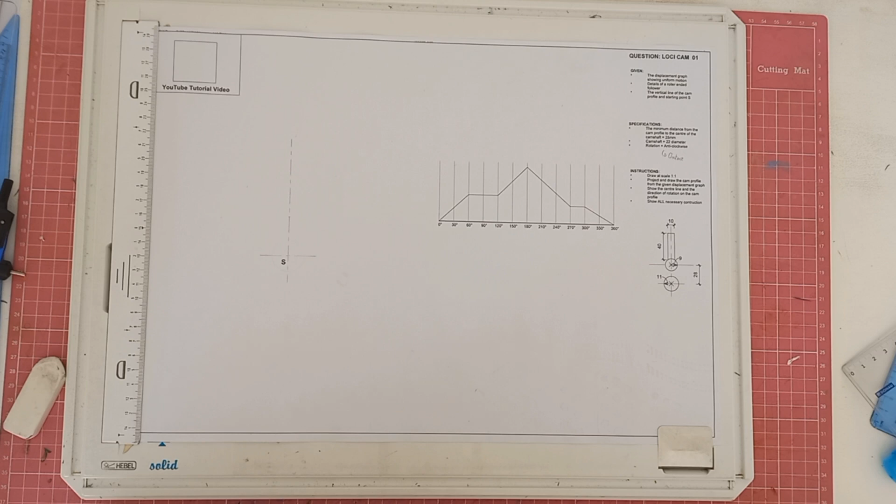So we know that when you do a cam, if they give you the rotation as anti-clockwise, it will become clockwise, just the same as if it had to be clockwise, you would label anti-clockwise, but in this case we will be labeling clockwise. Okay, this here is our camshaft, and it is where we are going to start our drawing.

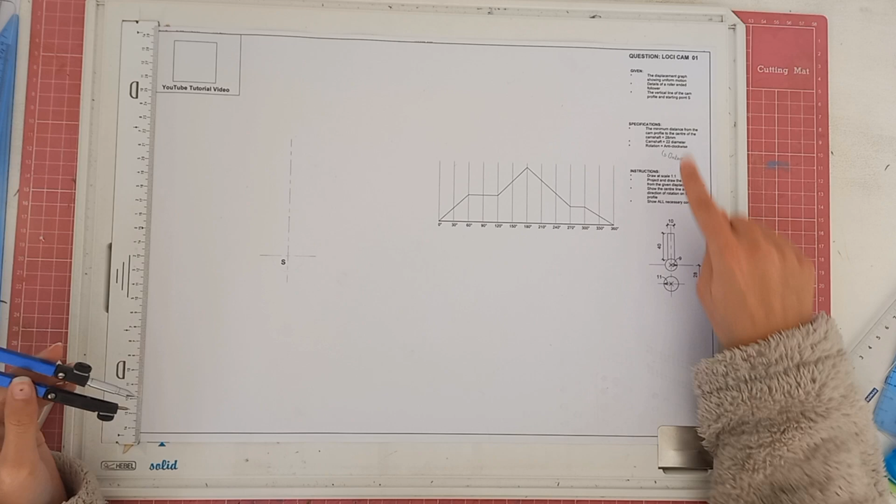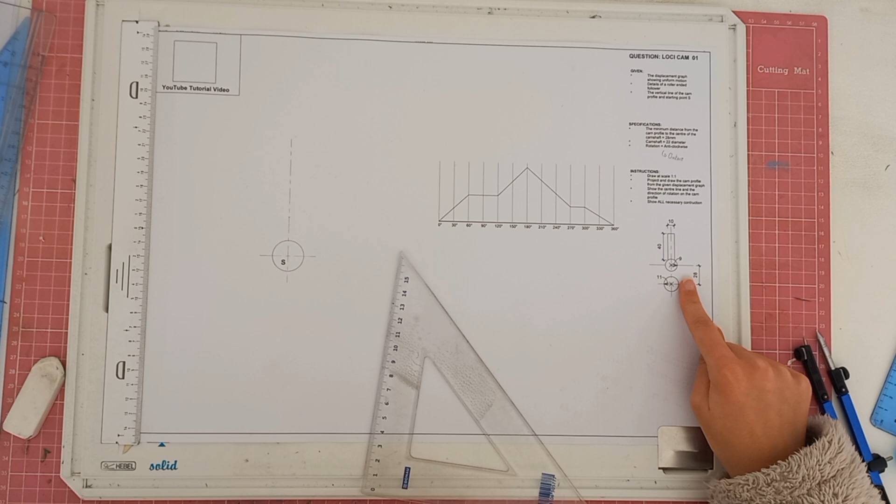So we're going to start off by taking the radius of 11, and once we've got our radius of 11, we are going to draw a circle on our starting point S. Okay, just like this over here. Once we have done that, we are going to take the distance from the camshaft to the center of the cam profile, and that will be 28. So we're going to measure 28.

And once we've got a line there, we're going to take our radius of 9 mils, grab it on our compass. So here we've got 9 mils, and we are going to draw a circle, and this will form part of the roller-ended follower.

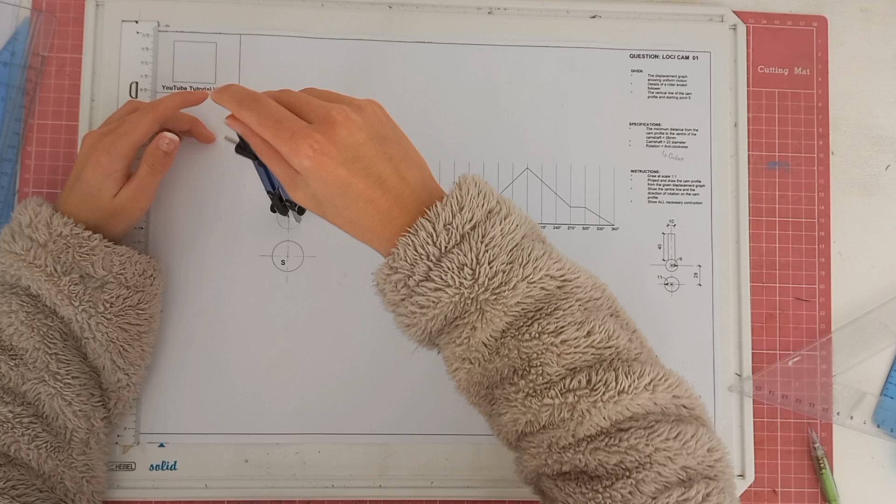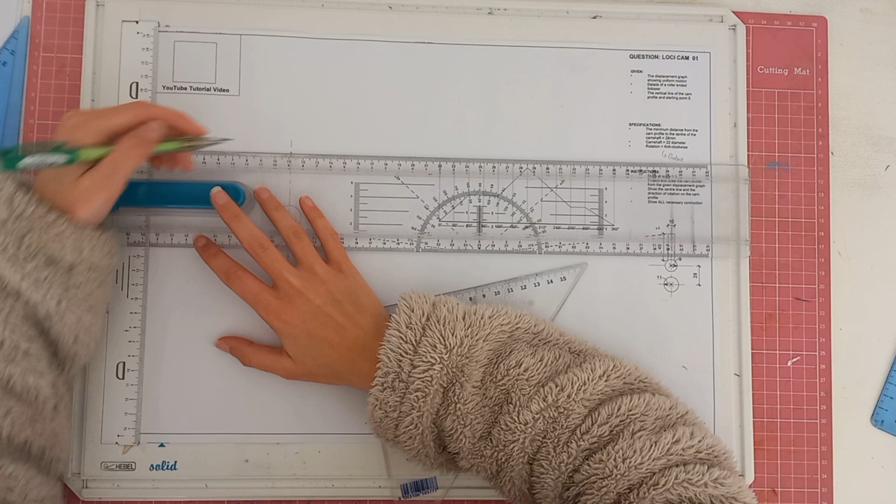Okay, so now that we've got that, we have got the total height of 40. So we're going to measure 40 from the bottom to the top over here, just like that, as you can see with the given measurements. And then we are going to draw a line at the top there, just neatly and lightly, and then we're going to measure 10. And this is all so that we can get the start of our cam together.

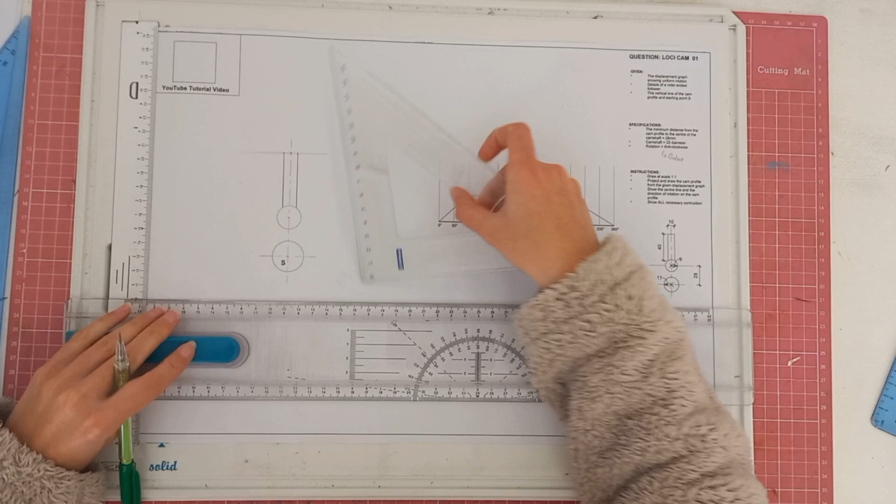Okay, so we're going to draw a line over here as well as a line over here, and then we'll obviously seal off the top as well. Okay, so there you can obviously see that our cam profile is done for the roller-ended follower, and we are now going to start drawing the cam based off of the graph.

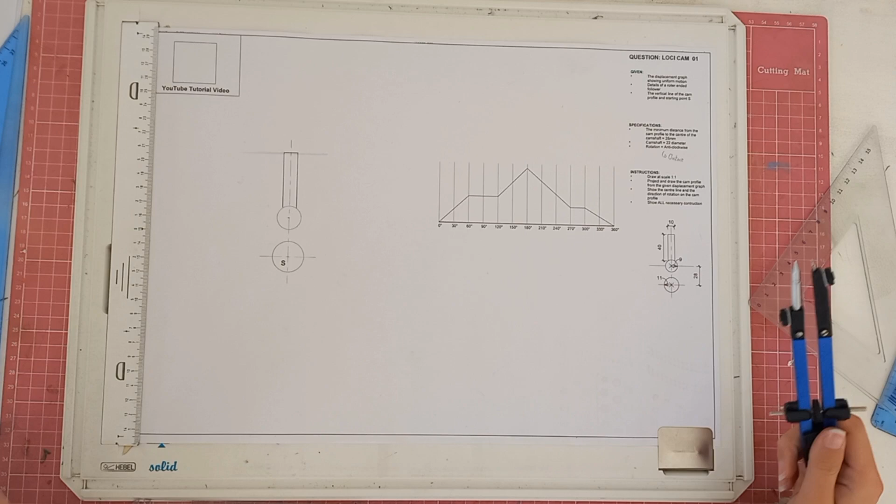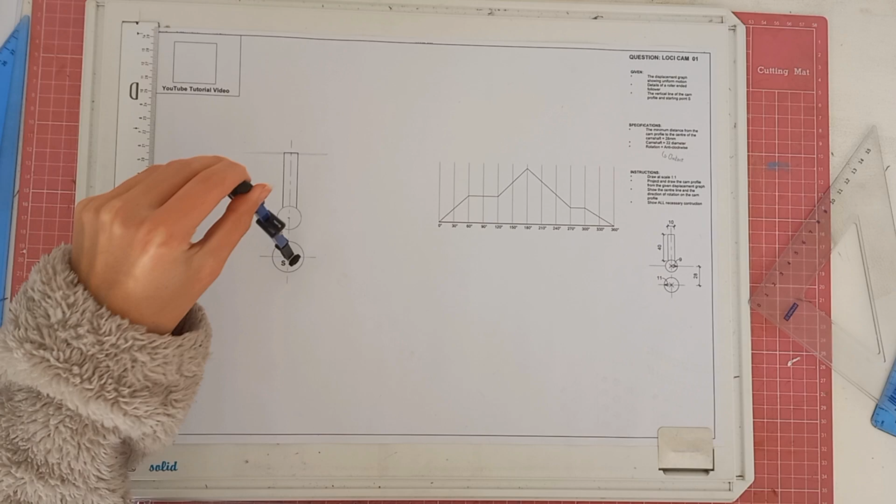So the first thing we are going to want to do is grab the height of our end bit over here. Okay, it should be in line with your graph as well, and you're going to start off by just drawing a circle going all around your page, just like this over here.

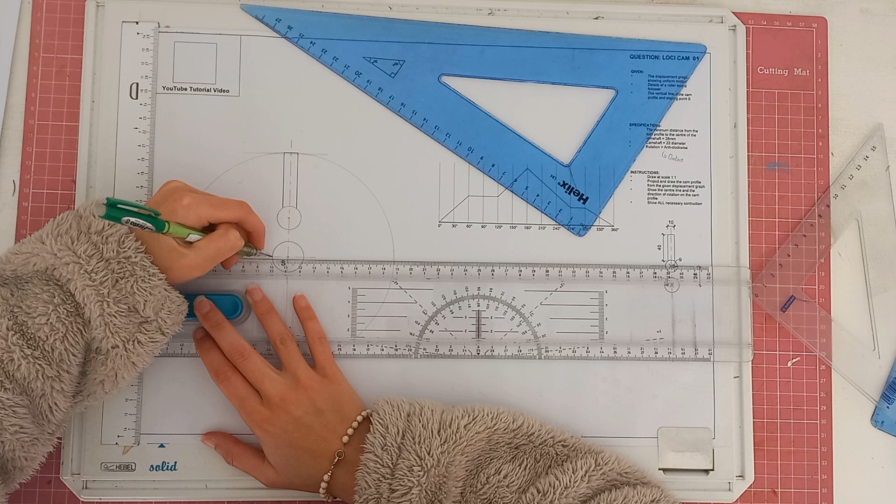Okay, and then what you're going to do is you're going to section your cam. So we're going to draw a line there to the end of the circle, and we will have lines over here as well. Okay, and then obviously we have sectioning of the circle, which we know will go in 30 degrees and 60 degrees, and so we're going to measure as such.

Okay, so we've got that over there, and then we will have this as well. So we'll have 60 degrees or 60 degrees and our 30 degrees as well. Okay, so just like this over here.

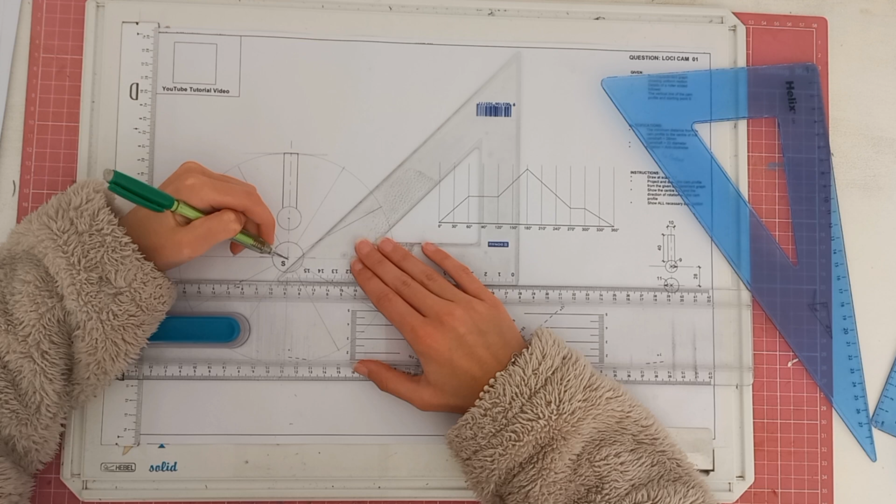The reason why I've left a space in the circle in the middle is because you are actually supposed to hatch that circle with 45 degrees, and so I think we should just do that quickly before we even get started. So let's just hatch that quickly. Remember, your hatching needs to be lighter than your total drawing overall. So we're just going to hatch that, hatch that, and hatch that as well. Okay, so it should look like this.

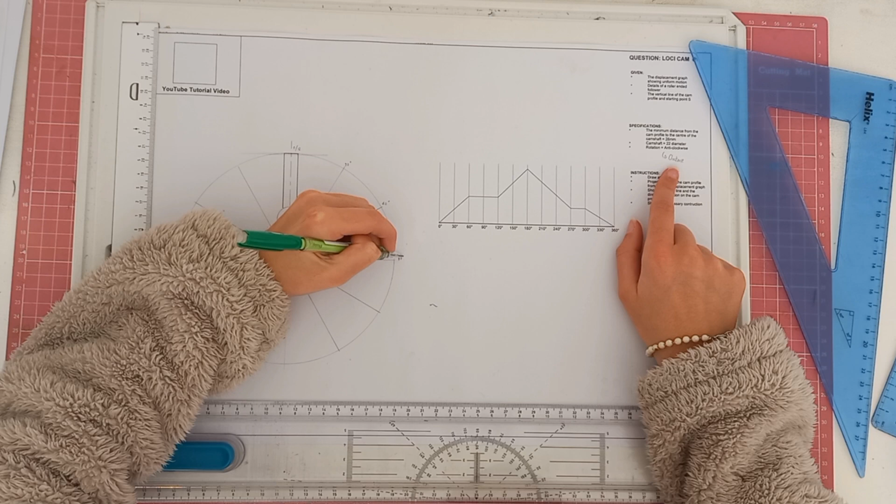Once we have done that, we're going to now label our circle. So obviously we're going in a clockwise direction, so we'll have 0, 12, we'll have 30 degrees, 60 degrees, 90 degrees, 120 degrees, 150 degrees, 180 degrees, 210 degrees, 240 degrees, 270 degrees, 300,

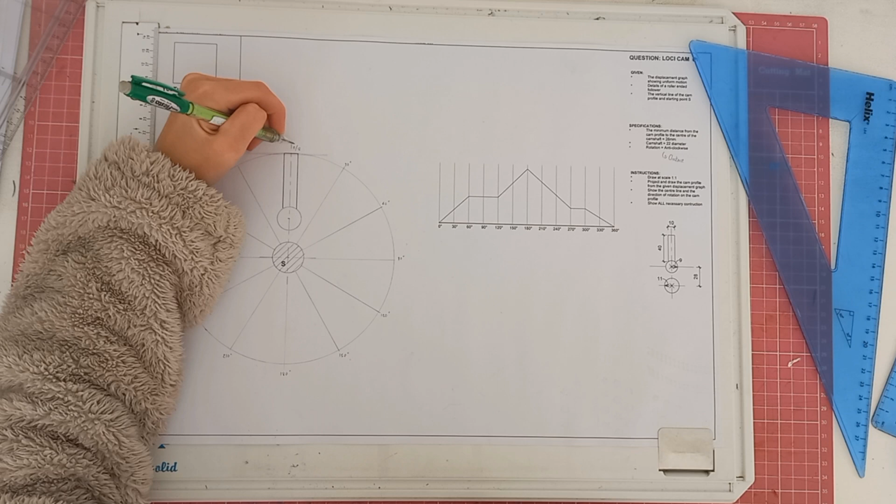330, and I don't know why I put 0, 12 here. This is actually supposed to be 0, 360 degrees, so my apologies for that. Okay, and you'll have something that looks like this. Now the reason why we label it is because it makes it easier for you to see where your cam is going to end up when you're drawing.

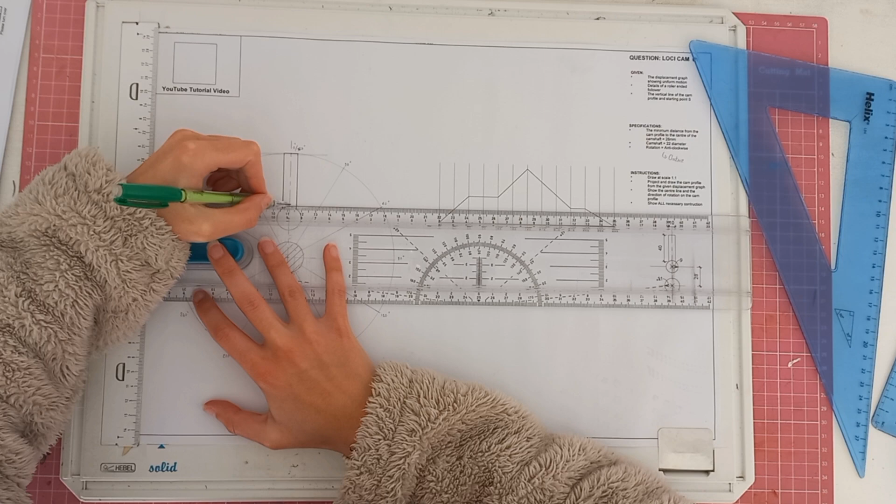And what I mean by that is 0 will obviously be right in the middle of our ball over here. Okay, so when we want to get the measurements of 30, we're going to draw a line going up. So let's just grab our point 30. We're going to put it on this line over here. As you can see, it's over there.

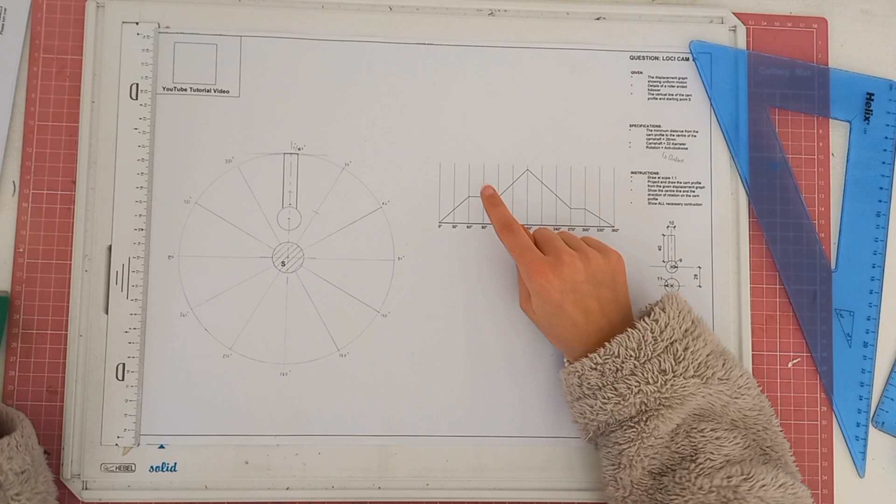And then what we're going to do is we're going to grab that point with our compass. So we should have that point over there. We're going to make a mark at 30. And we're pretty much going to do the same with the rest of the points. So here we've got our next point, which we're going to bring across onto here. Okay, and it obviously is the same for 60, 90, and 120.

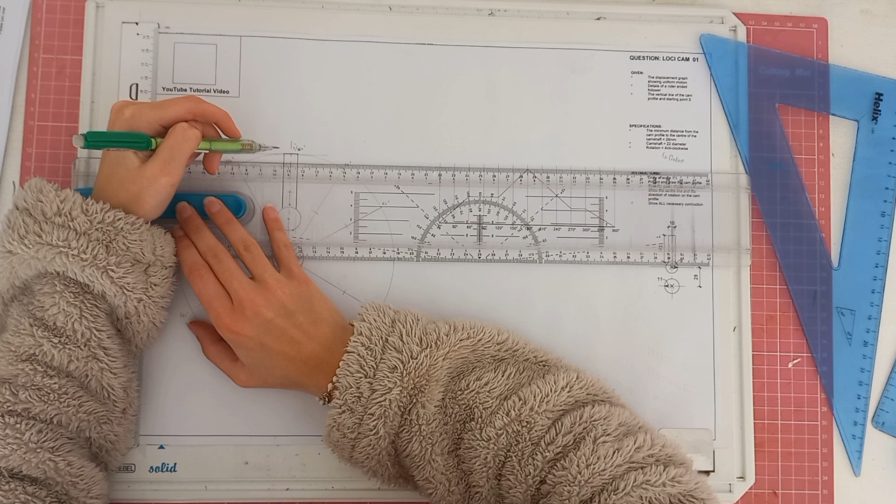And so you're going to grab the height of that point and you're going to make a mark at 60, 90, and 120. All right, once you've done that, you're going to continue. You're going to have 150, and let's just grab 180 as well. And if you have a look, you'll see that 150 and 210 are not quite the same, even though it goes back down again. So just keep that in mind with your points, not to assume that they are going in the same place.

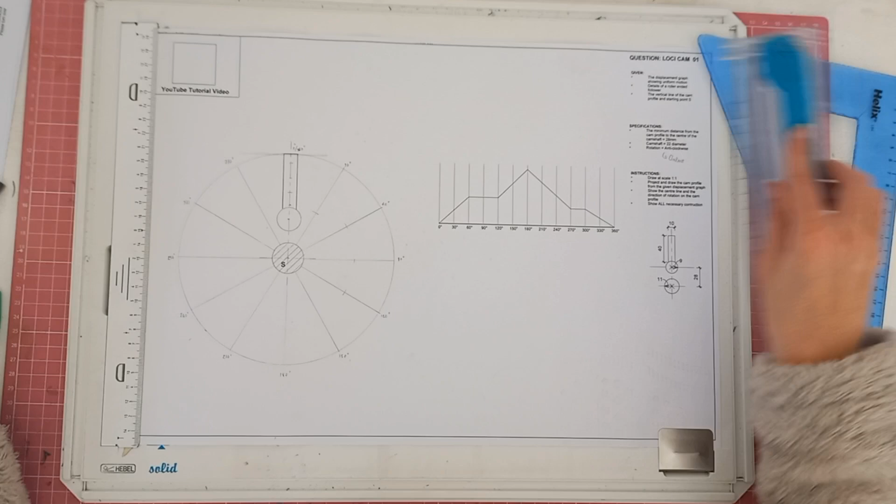Okay, so we have obviously got 150 over here. Let's just double check that, sorry. There's 150 over here and 180 over here. Okay, so we have got 150, and the graph in this is not quite in line, but it's actually fine. So you do not have to worry about that. It just shouldn't go over. The graph shouldn't go over this line here.

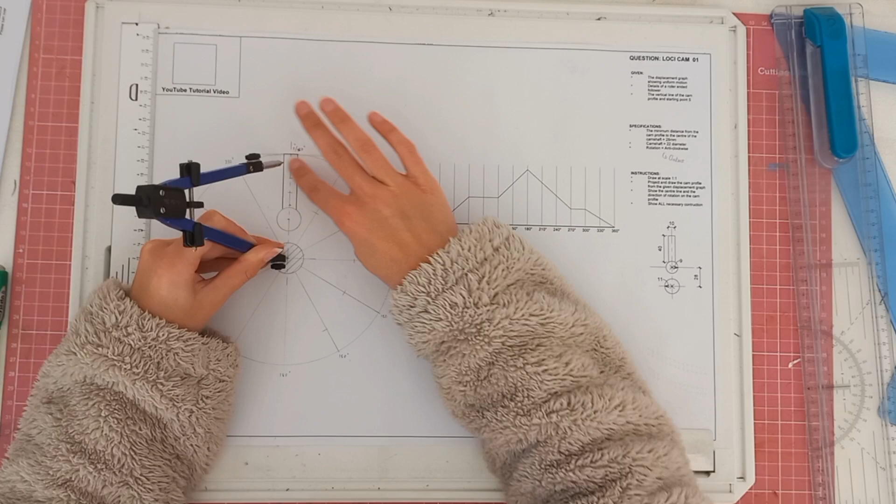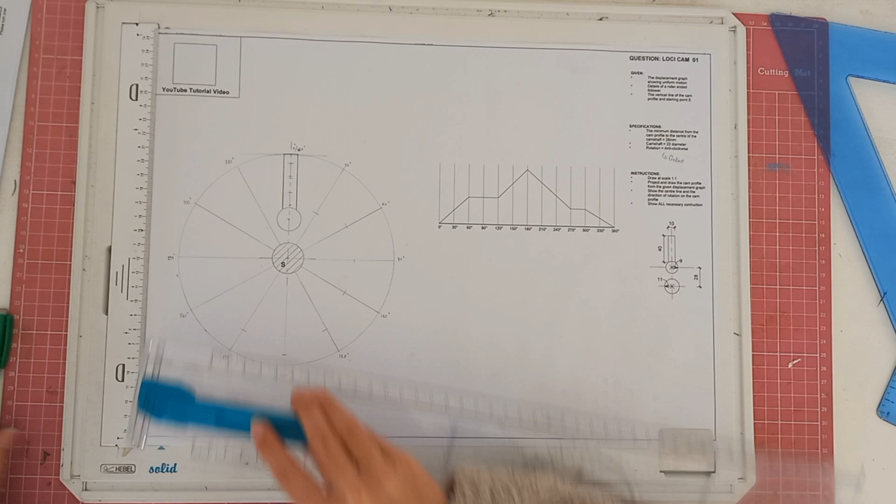Okay, and then we have got this line here, which will obviously be 180. All right, then we are going to have 210. So we're going to grab 210, make a mark. You can see it's slightly above 150. So we are going to grab 210 and make a mark as well. Okay, once we've got 210, we're going to grab 240.

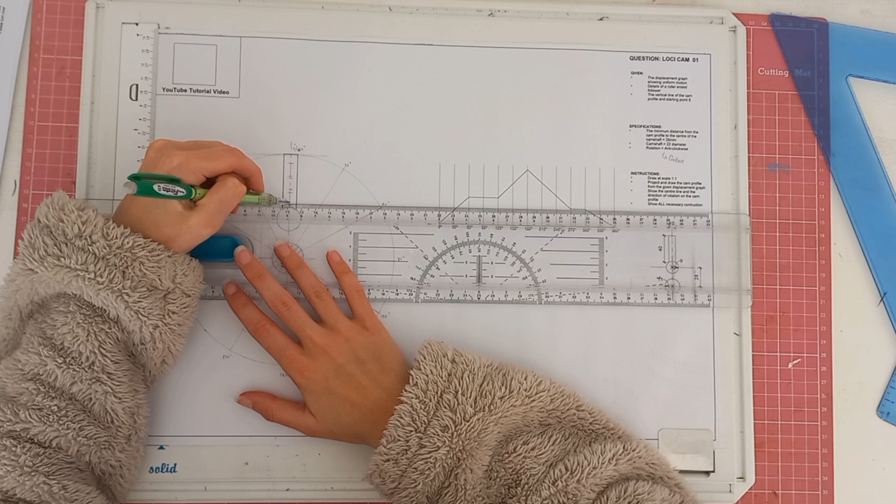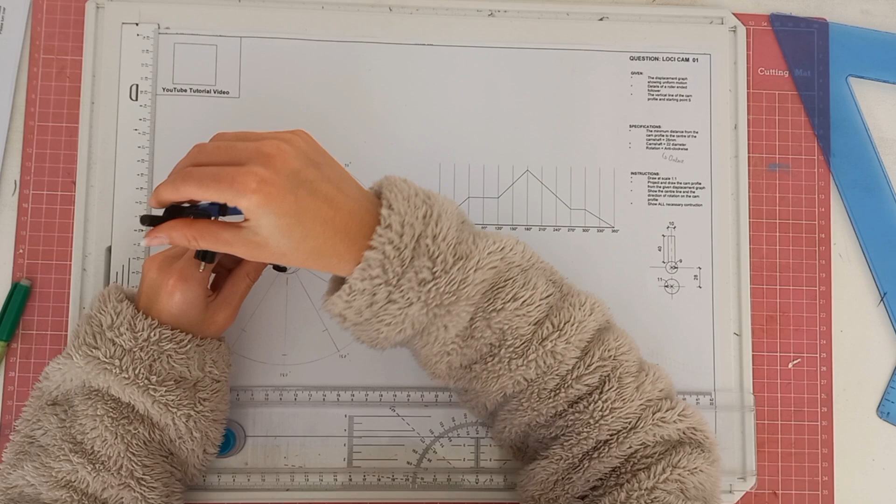Going to grab that point over there and put it on the 240 line. Okay, so far all you've got is just little marker points, and then we're going to grab 270 as well as 300, and then we're going to take that point, pull it across, and we're going to put it on 270 as well as 300. Then we're going to grab the final point of 330. So we're going to bring that point across. It's quite low, but it's fine. I'm going to grab that point on the line and bring it across.

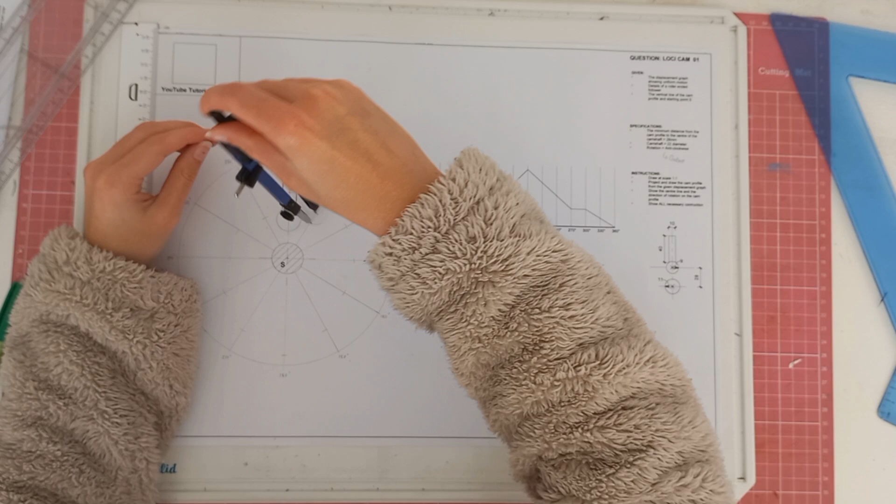Okay. Once we have done that, because this is our roller-ended follower, we're not done yet. We have to draw a circle from where all of these points are. So you're going to grab the radius of this little circle here, and you're going to use that to draw a circle at every other point. So it's a bit tedious, but just make sure yours does not fall out of the page, and you're going to draw circles at every point.

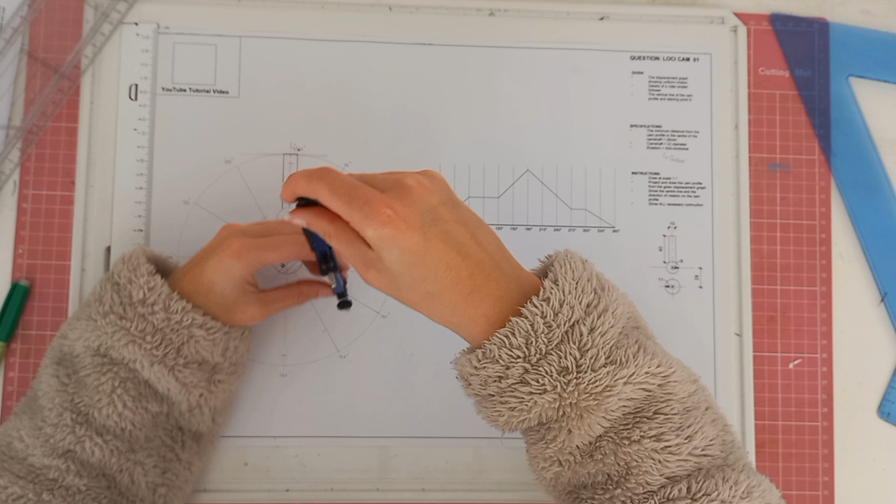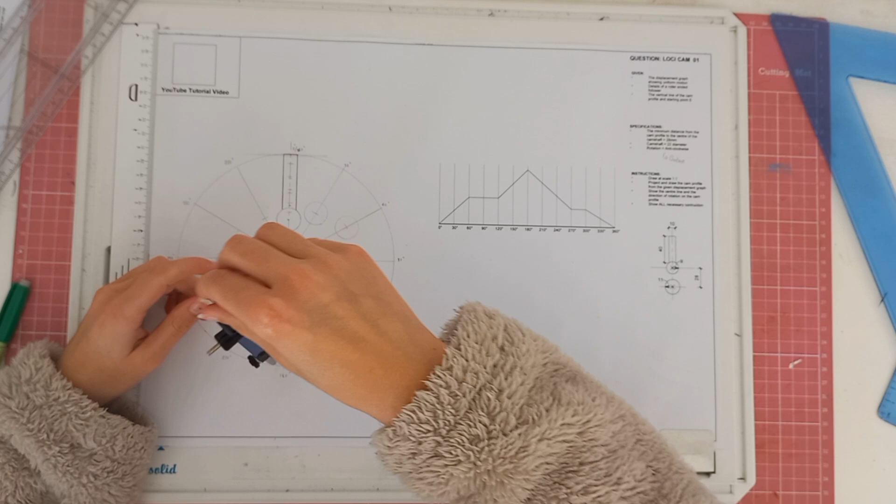Okay. And the reason why I'm pointing this out is because sometimes you get a knife-edge follower, and sometimes you get a roller-ended follower, and it does make a difference to how your cam should look. So it's important that you pay special attention to what it looks like, so that you don't mess it up, because you can lose quite a couple of marks by doing the wrong thing. Okay, so just going to finish up the rest of these circles. Okay, just like this over here.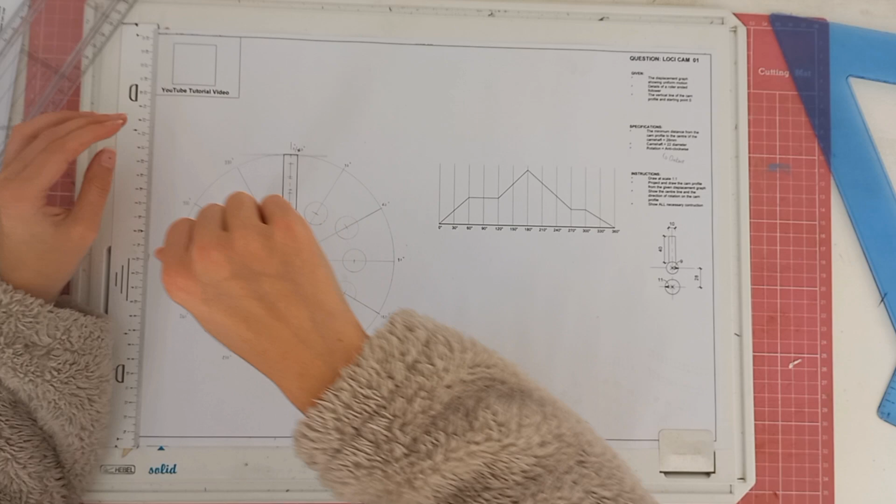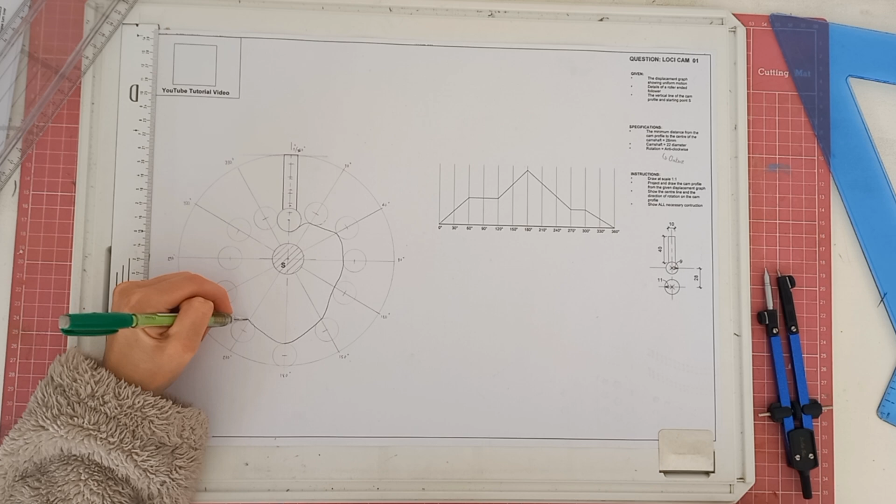So you'll see now that we've got all of our circles, what we're going to do is we're going to draw in the cam. So freehand, you're going to draw in your cam, and you're going to try be as neat as possible while drawing your cam. So if you need to just go slowly to each dot so that you don't have overlapping, that would probably be better. Otherwise you'll end up with something messy. So don't rush through this, take your time and draw the cam neatly.

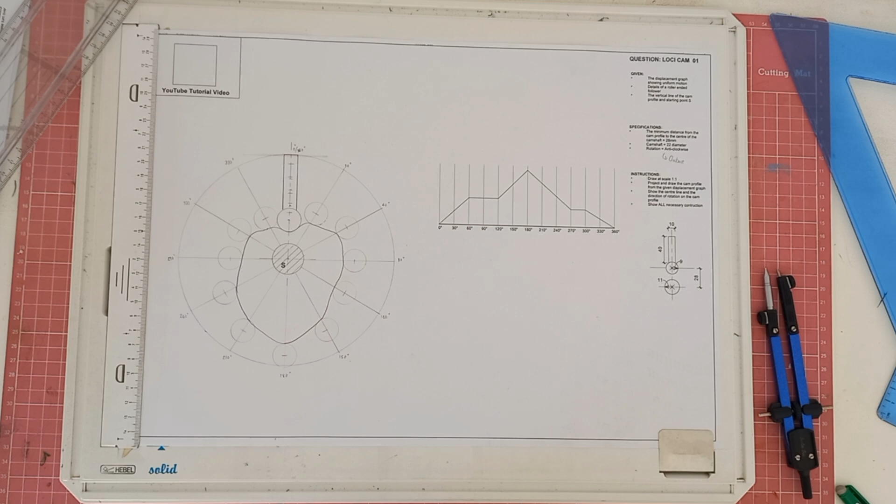Okay, and there we go. Simple as that. We are done with the cam drawing. So I hope this helped you guys and helped you visualize a little bit what it takes to draw a cam. And we'll obviously move on to more intense questions further on. But for now, we just wanted to start you off with something easy, and so we hope this helped you.